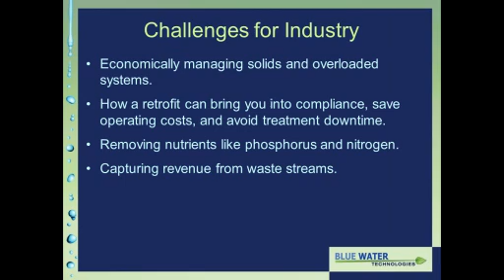But primarily I'm going to focus on getting the most out of your existing system, either through a retrofit or something of that nature, and capturing some of the lost revenue from what are currently regarded as waste streams.

Many plants in the industry have minimal treatment integrated into their existing process, and therefore they discharge to local sewage works. The primary expense in this situation is often in surcharges. Regardless of whether the facility discharges to a city or has its own biological plant, this slide illustrates where much of the water management expense is incurred.

Typically, if you're discharging to a public works system, you're paying surcharges to that system. A DAF will obviously reduce that to some extent, but typically those surcharges are going to be mass based on BOD, TSS. Quite often nutrients will be on that, as well as total volume of water discharged.

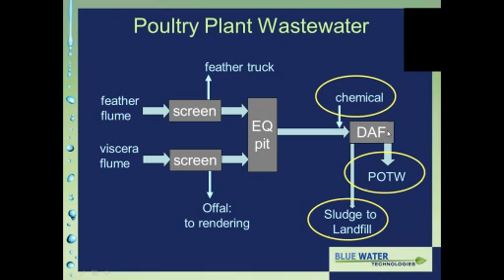Blue Water's primary goal is to save you money by working with you to improve your existing facility treatment capabilities. Blue Water is a very capable industry partner, specializing not only in unit process design, but also bringing a broad experience in cost-effective solution development. So we provide not only equipment, subunits to a treatment train, but quite often we will package together treatment solutions.

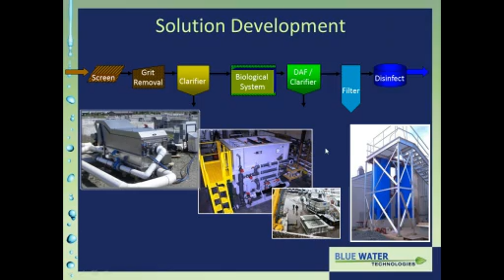Over the following slides, I'm going to highlight the benefits of various treatment stages that I mentioned on the last slide. I'll begin with the EcoMat rotating belt filter, highlighting what Blue Water sees as a critical treatment stage to any water discharge system in the poultry industry.

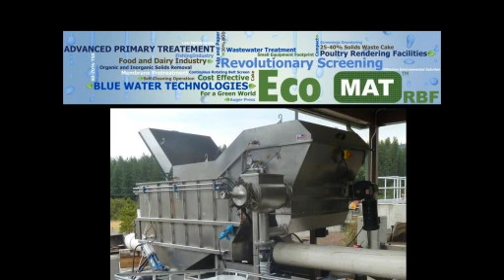Here you see pictured one of our larger units. This unit will treat roughly 1 million gallons per day, so it's got a very small footprint. Over the next few slides, I'm going to highlight some of the benefits of that. This is key to a well-functioning poultry application or poultry water treatment system.

I'll take a moment to summarize why the EcoMat is a critical subunit to an efficient process water system. A lot of the expenses I noted can be reduced with this unit. The EcoMat has a very unique filtering capability, so its efficiency is much greater than that of a drum filter, for example. It removes high amounts of TSS and BOD, upwards of 50 to 80% TSS, up to 50% BOD as well, and that's achieved as a completely mechanical process, so there's no chemical costs. It's very low power cost for this system, as I'll highlight later on. So there are some very stark cost reduction capabilities with this unit process.

In addition, what we've recognized over the last few years of integrating this equipment in the poultry industry is you can capture or recapture a revenue stream. The solids collected, if done without chemical, can have value in rendering. This captures between 50 to 60% of the solids out of the waste stream, which is significant when you're talking about a waste stream that might have a couple thousand milligrams per liter of TSS. So there's a rendering value to that. If you capture early enough in the process, your grease value is much higher. Yellow grease, for example, sells or is priced currently between 40 to 50 cents per pound. So there's some value in that stream.

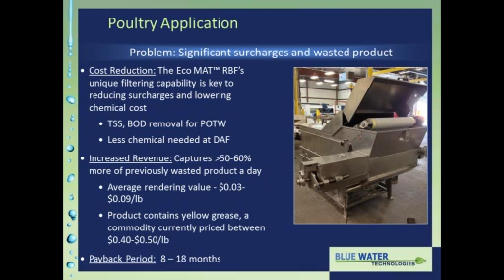In capturing that value, you also get a reduction in your sludge management disposal costs. There are other facets to this treatment process we like to point out, and that's typically how we'll have a very positive payback when we retrofit or do a new installation with this piece of gear integrated into the treatment train. Typically the payback is anywhere from less than 1 year to less than 2 years, so a very positive payback on this piece of gear.

Some of the key benefits are highlighted in this broad process flow diagram. The EcoMat is a low-energy input subunit that saves money by reducing chemical use, increasing effluent quality, and producing that value-added solid slurry, as we mentioned. Typically, a lot of plants attached to poultry processing, poultry kill plants that discharge to public works systems, have DAF systems or some sort of screening already in place, whether it's overloaded or not.

The nice thing about retrofitting the EcoMat is its very small footprint makes it easy to retrofit, but it takes over 50% of the solids loading off of an existing treatment system with just that small unit process. That's a huge reduction in chemical usage, a huge reduction in power usage, and it leads to a higher effluent quality coming out of the back end of that process going to a public works system. And again, there's that rendering stream.

Now, if the plant has its own biological treatment process, this will help with any overloading issues because you're taking up to 50% of that solids and BOD loading off at the front end. So that biological treatment system can maintain a compliance level much more easily and cost-effectively.

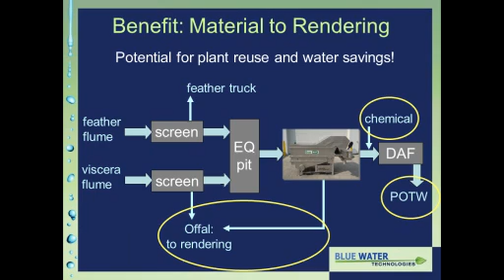So I mentioned drum screens earlier. The EcoMat's been integrated downstream of primary drum screens as a secondary barrier. It's also been integrated as the primary and only screen on a treatment process as well. So here's a rough comparison of the EcoMat rotating belt filter operating in parallel with drum screens for operational comparison.

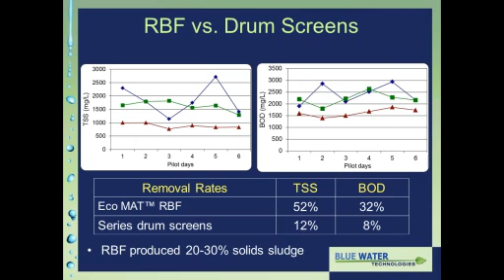And it's very reliable, engineered to be very sustainable in a variety of applications, not only the poultry industry, but we provide this process to a variety of industries, including municipal sewage industries as well.

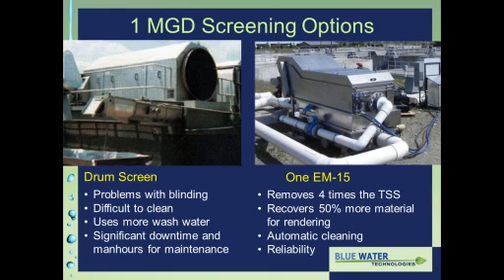As I mentioned, the bottom line is money and cost reductions, cost savings. You can save money in terms of space, capital, redundancy, flexibility. Money takes many forms in these capital projects, and this just kind of illustrates a comparison.

Now again, this is a conventional clarifier. A DAF system is slightly smaller, but you can see there's significant footprint differential. The EcoMat is very easy to install because of its footprint. You don't have extensive earthworks or concrete design costs, engineering costs, engineering the pad even. All of that can be very expensive. So if one of these systems is being installed, there's a lot of upfront capital advantages to this treatment system.

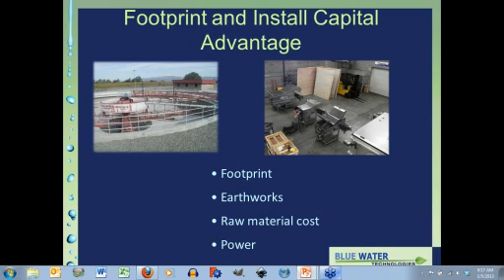So illustrating the benefits that I've highlighted is this case study for a Blue Water provided rotating belt filter in South Carolina. This was installed as a secondary screen. They did have a drum screen as their primary. They had no further treatment, didn't even have a DAF system actually at this particular location. So they just had screening, then discharge to the public works system.

This particular plant was a kill-only plant. They averaged between 0.6 and 1 MGD peak flow for their processed water flow through this plant. The install reduced the surcharges to the public works system, and through recovery of renderable materials, they had inside of a year payback. There's a couple of figures here: this has been operating since February 2011, and they average roughly 6 to 8 pounds of dry solids per 1,000 gallons of processed water treated for rendering.

So that again just illustrates a positive economic scenario where this rotating belt filter can have a very positive impact to the overall economics of the poultry processor.

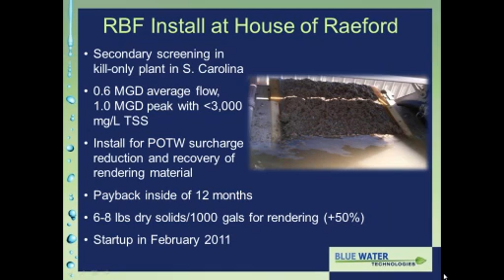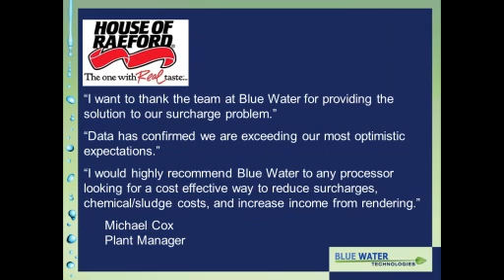This is a reference from that plant in South Carolina, and we're very happy with the installation. With all of our installs, not only this particular technology but all of our product lines and process solutions, we have several recommendations and references that can be supplied by request.

I want to transition and give you further definition on our rotating belt filter and examine how it works. How does it function? What level of treatment will it provide? We've touched on that briefly, but I want to give you more detail, and describe how it ties into your plant and what it will do for primary and or secondary screening.

The theory of operation, the methodology of solid separation, is that the screen builds up more and more solids and forms a thick mat, which filters out smaller and smaller particles. That's how you get those high efficiencies of capture. The belt travels upward and is cleaned on the backside, so as it comes around the bottom end it's a clean mesh. You get screening to the pore size of the mesh, typically a 350 to 500 micron mesh. As you collect more particles you start building a semi-porous mat, so you get filtration as that mat thickens. Your effective mean filtration size decreases as the mat grows thicker, and therefore your capture increases as well.

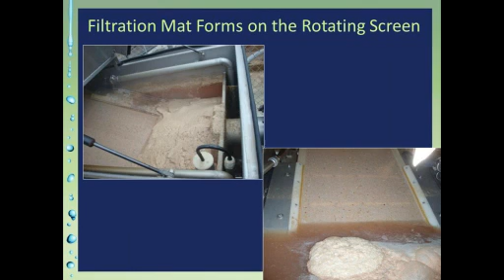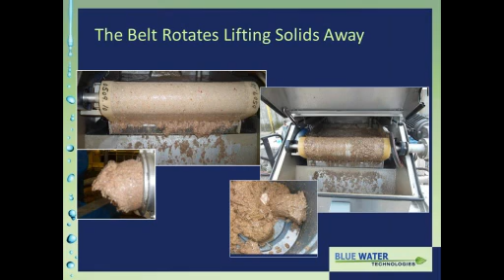In this next picture you can see the top end of the roller where the solids come over the top and are discharged into a sludge conveyance or dewatering hopper. There's a screw in this hopper, and whether it can be dewatered depends largely on solids particle size and the amount of fibrous material remaining in the waste stream. Here are a couple of pictures of applications where dewatering was achieved. Again, that's cost reduction in solids management and handling, and it also provides a drier stream to a renderer for rendering out the fats and proteins.

Just another shot of that sludge conveyance. Looking down into the hopper in this upper left-hand picture, you can see a conveyance screw, and depending on the solids makeup, you can have a solids discharge, or it might look more like a slurry that's roughly 7 to 10% solids. Sometimes those slurries, even though they're soupy, are slightly higher in solids because the moisture content is pretty low—there's actually a lot of grease in there and a lot of smaller particulate.

I want to point out that Blue Water can demonstrate this process in a variety of ways. We do a lot of pilot systems and pilot programs around the country where we'll demonstrate the capability of the process before going into design. There's also bench test simulations that predict performance prior to even coming on site for a pilot. We just gave one away at the Poultry Expo in Atlanta. A pilot is a good way to prove out this technology before design, to estimate how much solids can be removed and estimate the rendering savings, O&M savings, chemical reduction, etc.

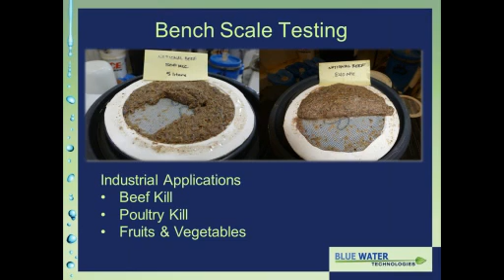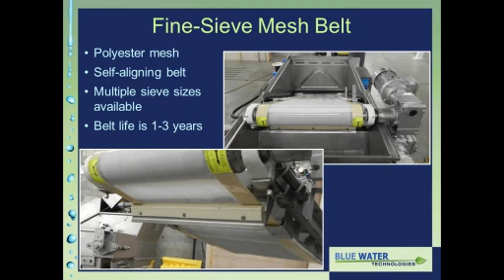There are multiple sieve sizes available, but as I pointed out before, typical sieve size for a poultry processor is going to be between 3 and 500 micron. These belts are designed to be very long-lasting. Typically the belt life is 1 to 3 years, and they're very simple to change out.

To handle waste streams with high amounts of oil and grease, which you typically have in poultry processing, there is an integrated hot water wash. We've used this EcoMat rotating belt filter in a variety of different applications, including beef and sausage processing, a lot of applications where there's a high amount of grease. This periodic degreasing works very well. Typically we program this to come on maybe once every 30 minutes or once every hour, a 30 to 60 second wash, low volume, typically 2 gallons a minute for most of our single units. So a very low volume degreasing wash that can maintain that high level of performance and separation for this unit process.

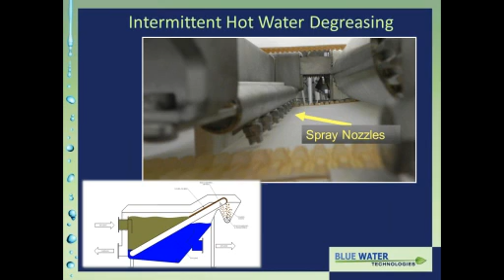The cartridge mount configuration is really what makes this technology so expandable in treatment capacity. Blue Water has 4 base cartridge sizes integrated in a flexible and capable product line. The modular nature of the machine means it can be integrated on any flow range. We've integrated these on some sausage producers with flows averaging 30 gallons a minute. I'd say the majority of our poultry kill plants are in excess of 1 million gallons per day, up to 2 million gallons per day. That's a fairly typical range for how these are installed, but again, we can handle any treatment capacity because of the modular nature of this technology and equipment.

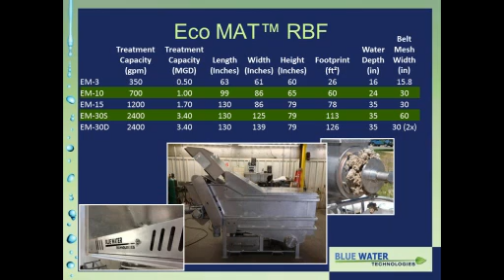Here's just a couple of production photos to share with you. These are units on our shop floor going out to customers. You see pictured here a half MGD unit, and in the back there is actually a 1 MGD unit. That's our EM3 and our EM10 units. This is also an EM10 in the lower right-hand picture. These units are made in the USA. Our manufacturing is located in the northwestern U.S., so we can provide the support necessary to keep your system online continuously.

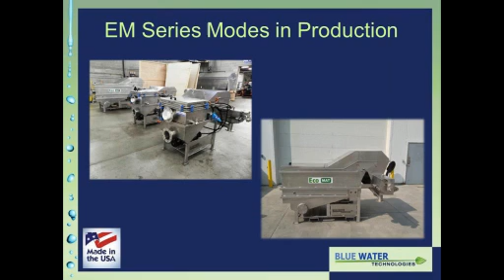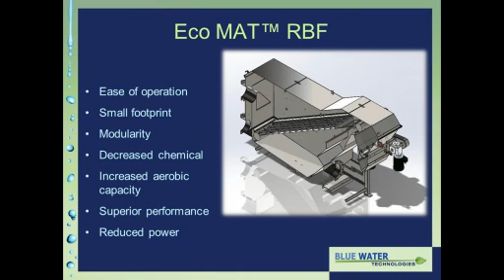Just to summarize this unit process before I move on to our other treatment technologies, we really believe this is key to an effective process. One, you run without chemical. It's very easy to operate, small footprint, fully automated, modular, and you increase the capacity and capability of your downstream treatment process, whether it be a DAF, a biological system, or a filtration system. It adds superior performance to your entire treatment process, with low power input, very much reduced power not only within the system but within your downstream train, because you're removing so much of the load.

Now I do want to transition to other treatment options that can be provided based on need. The EcoMat and other clarification systems remove high amounts of TSS and BOD, but there are some applications where further BOD reduction is required. Maybe getting to a discharge level of 200 or 150 milligrams per liter BOD isn't enough, maybe you got to get to 50 or 20. In that case, you're looking at a biological treatment process because all of the remaining BOD is going to be completely dissolved. Another situation that might require biological treatment is if you have any need for nutrient removal.

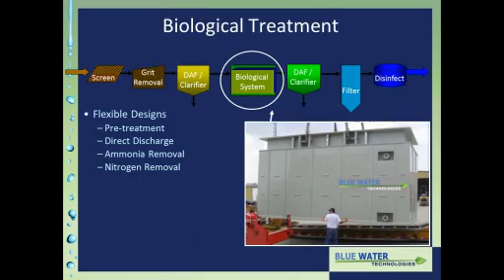Blue Water has a technology, or several technologies actually, for biological treatment that could be readily implemented. This is an MBBR system. They're great because they have a compact footprint, typically a slightly higher energy input than activated sludge, but again you get that reduced footprint savings, very capable treatment. It is a fixed film process, so it's fairly shock resistant as well.

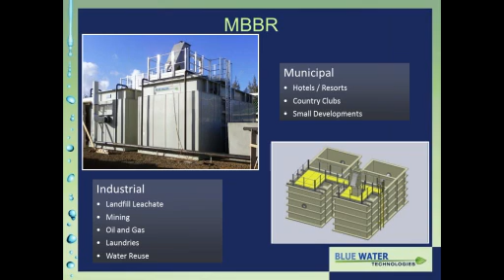We have our EcoDAF system. It's great for TSS and BOD reduction. Single unit capacity is very modular, anywhere from 5 to 1,500 gallons a minute, and we have a very consistent track record in the poultry industry for treatment using this technology.

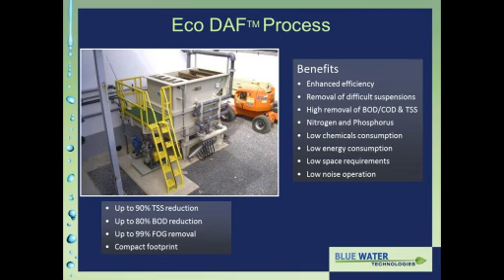In regard to the bench testing or pilot testing conversation I had earlier with the EcoMat, we do the same thing with our DAF systems, and sometimes we'll do it as we're doing an EcoMat pilot to help optimize the existing chemical regime. So we prove out that we can get a chemical cost reduction and then show that treatment either with jar testing or with a pilot system on site.

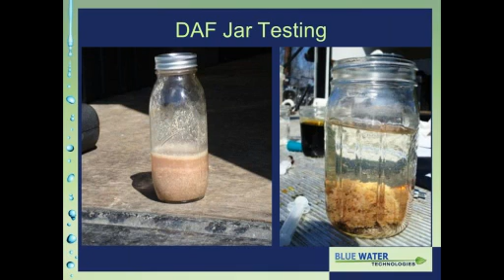Now, nutrients traditionally haven't been a huge thing in the poultry industry, but I'm bringing them up because they're becoming more and more important. If you're discharging to a public works system, you're going to see them more and more on the discharge surcharges, and typically they'll be fairly expensive, especially regarding phosphorus and nitrogen, because the poultry discharge water has a high level of nutrients, and that's a high load to their plant that they're going to charge you for. So we do have some really good technologies for reduction of nutrients. Actually, that's one of our primary businesses in other markets, the municipal market itself.

Our brand is the Centra-flo filter. It's a media filter that provides water reuse quality filtration. So if there's any opportunity for water reuse in the plant, this is a key technology to consider. Like I said, it supplies water reuse quality filtration. You can get a reduction in the amount of water you're bringing into your plant for usage, and a reduction in the water you're discharging from your plant. So there's a couple of opportunities for cost savings just in polishing the water of solids.

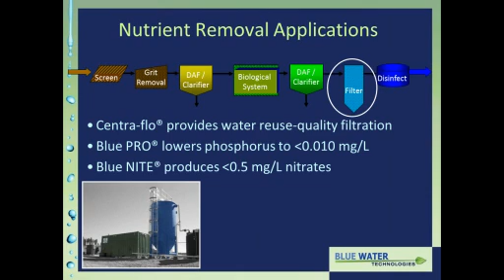In addition, we can implement processes, the Blue Pro process and the Blue NITE process, to remove nutrients. We can remove phosphorus all the way down to below most any compliance level I've seen throughout the U.S. We have installs operating at less than 0.010 milligrams per liter, which is lower than most people will see. Most people in this next round of permitting for a lot of plants are seeing maybe 0.1 or 0.07. We also provide the Blue NITE system, which can polish nitrates down to below detection limits. We've installed those in applications where the influent might be nitrogen-rich, up to 200 milligrams per liter of nitrates, going out at less than 10, less than 5, or less than 1, whatever the requirement may be.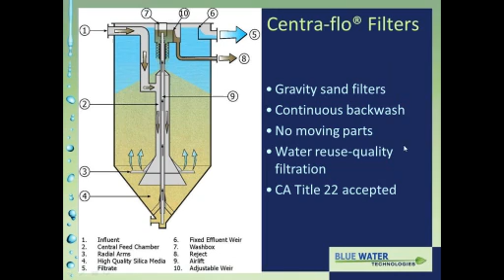And again, the water reuse quality filtration. They are California Title 22 approved for reuse, and they're also approved in multiple other states as well. But since California is one of the more stringent, that's typically the one we'll advertise the most.

Now I'm going to focus on nutrient removal over the next few slides. For phosphorus removal, the real key to our life cycle benefit and chemical cost minimization is the adsorptive properties of our process. What's been very traditional or conventional in water treatment is the use of coagulation and then filtration to remove phosphorus. Well, Blue Water doesn't do that. Coagulation and filtration, just to give you an illustration, is you dump a coagulant, a chemical, into solution, a bathtub, a clarifier, and you try to form a large enough particle size that it will not fit through the media, so it'll get trapped in the interstitial spaces of the media. What that leads to is a plugged filter. You're always operating a semi-plugged filter, and it's not very efficient chemically.

What we do is we actually coat the media with a metal salt. We add a ferric salt typically to coat our media. It gives a very homogeneous ferric hydroxide coating to the entire sand granule. That's what we use, the silica sand, so it's a commodity media, and it's a commodity chemical added to create that coating. What that coating does is it will adsorb phosphorus. So rather than relying on diffusion in a big bath, which is what coagulation does, we guarantee contact between any dissolved phosphorus in the stream and the adsorbent, the substrate, which is the ferric hydroxide. So you're guaranteeing contact. A media bed that has 60 inches of depth has an astronomical surface area, so very high efficiency uptake of dissolved phosphorus in this system. That's really the key to minimizing the chemical and operations costs and achieving compliance levels.

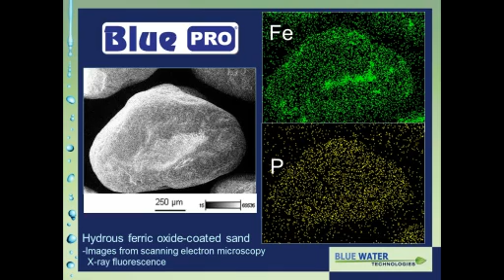Here's a couple of case histories I'm going to share with you regarding phosphorus that we've done around the country. This is more to illustrate the size of systems that we've done, because there's challenges that are unique to very small systems and very large systems. So this first one will illustrate some of the challenges that were overcome with a very small system.

2 CF-7 sand filters, 25,000 gallons per day peak flow on this particular system. But they had a very stringent phosphorus requirement, so they have intermittent flow. There's a recycle tank on this process. But you can see here the design was very capable. This was just a month of operating data from last year, actually.

So you can see the compliance level highlighted in red. There's two stages to this treatment system just to guarantee compliance. With stresses to the system, sometimes that first stage will go over the compliance level, but largely it actually meets it. In the second stage, you're guaranteed that compliance level for this particular system.

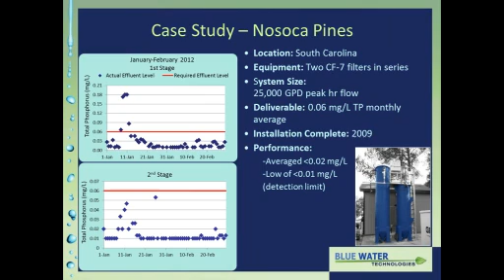So that's a good example, a strong example of a case where the system was very small but very well designed and very capable. This next story I'm going to share is on the other end of the scale. It's a very large system, peaking at 12 million gallons per day treatment flow. Again, this is another technology that's very modular, very expandable for treatment, and very flexible for levels of treatment compliance.

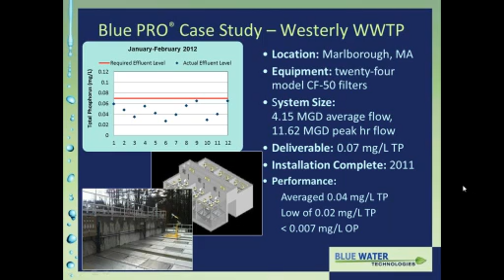Many of our industrial discharges might only need to meet a milligram per liter phosphorus. That's pretty typical. Some are being pushed to 0.1. It's fairly rare, mostly in Midwestern states like Wisconsin and Minnesota, that are having to meet anything more stringent than 0.1 as an industrial discharger. But here's a case where they are definitely meeting 0.1. They're actually permitted to 0.07 and maintaining that level very well. This one is in Marlborough, Massachusetts, and it's been operating now for a little over 2 years.

Now, in addition to phosphorus removal, we can do denitrification, and we can do it within the same treatment stage, within the same treatment vessel as the phosphorus removal, which is one of the strengths of our technology. So you get polishing, filtration, phosphorus removal, and biological denitrification all in the same treatment stage.

This case study is from Texas. The total phosphorus coming in, after the biological treatment plant up front, was down to 3.4 average coming in, and left at 0.14. Their permit was 0.2. And then for nitrate compliance, they were coming down from nitrates greater than 10 to less than 2.2. Their compliance level there was 2.5.

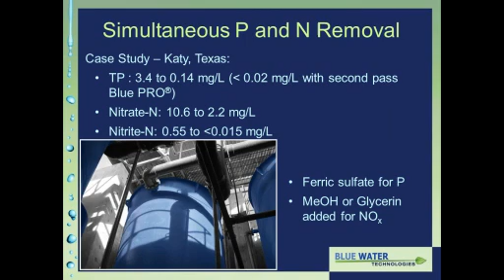So it's a very economical system, because you get multiple benefits from one treatment stage, with very low chemical inputs. You have ferric sulfate in this particular case for the phosphorus removal, and that's just to coat the media for this system. And then we're adding either methanol or a glycerin product, some other carbon source potentially, for removal of nitrates, to convert nitrates to nitrogen gas biologically. So again, a very successful case study for implementation of those nutrient considerations.

I'm going to leave that now and wrap up with some of our manufacturing capabilities. So you've seen sampling of our processing equipment. Our manufacturing capabilities allow us to provide not just unit processes but solutions. We're not just providing a cookie cutter insert that you can fit into your treatment scheme, but we can work with you and provide a well-integrated treatment system that'll fit into your puzzle very nicely.

Again, I'll highlight that we have a UL listed panel shop, so we can do completely customized controls. We do have mobile systems as well, which probably isn't extremely interesting within the poultry industry, other than to demonstrate and prove out the technology. But again, I will highlight that we're a U.S.-made company.

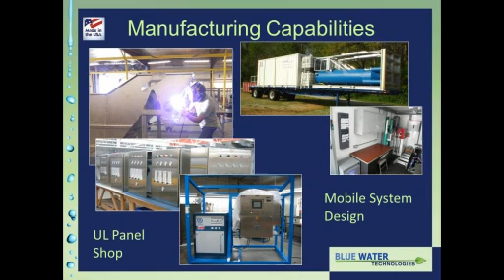This is a pilot system that's mobilized. It's actually in excess of 1 million gallon per day capacity, so this will do quite a large flow, but we can mobilize this system as a pilot system as well. As I mentioned, the benefits are for treatability projects, contract treatments, while doing a design build to save money in the interim. You can do an economic analysis, a short-term pilot study, and also demonstrate it for engineering or plant manager confidence, basically.

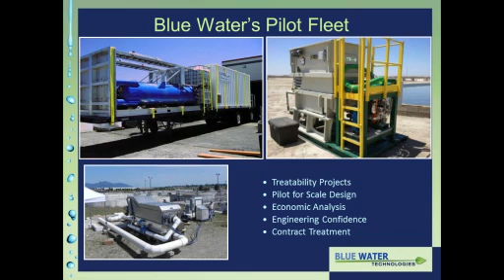So with that, I'd like to conclude our presentation today. I hope that I have sufficiently shared our methods for managing overloaded systems or discharge challenges. We can help reduce the financial impact of water treatment to your plant. We've highlighted increases in rendering revenue, recapturing a waste stream, turning it into revenue that can help pay for the water treatment and disposal throughout the poultry processor, the kill plant.

In addition to that, with integration of our EcoMat rotating belt filter or other unit processes, we can decrease overall chemical usage, power costs, and hauling costs. So those are all cost reductions. In addition, surcharge reductions, if you're discharging to a public works plant, a municipal plant, a sewage plant. And in addition to that, if you can get any reuse, there's a decrease in water usage and cost as well. So I hope that gives you a broad overview of what Blue Water focuses on in new projects.

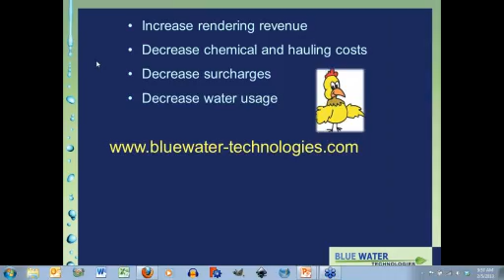What are typical replacement parts and costs for the EcoMat rotating belt filter? I mentioned low life cycle costs for a lot of our equipment, including the sand filters. It's a non-mechanical system, so that has very low operations and maintenance life cycle costs. DAF systems, same thing - you have a couple of pumps that may or may not need to be replaced throughout the life cycle. EcoMat is actually very similar. You do have bearings, a head roll and a tail roll. I'm going to go to a cross section of that system so we can look at the mechanical components more closely.

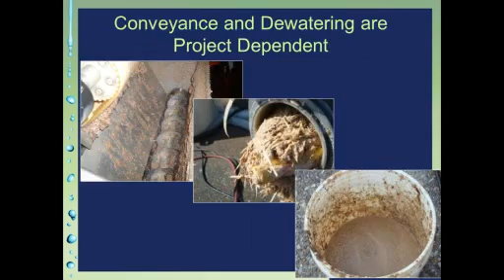Another question is how easy is it to simulate phosphorus testing on the bench scale? I talked about EcoDAF systems on the bench scale and the EcoMat - we can also do full simulation of our nutrient removal and filtration processes on the bench scale, including our adsorptive phosphorus removal. We actually do a lot of bench testing for other industries, not just phosphorus, but for metals compliance as well, like zinc, copper and lead. We do a lot of power plants with that same polishing technology, and we can simulate all of those on the bench scale as well. The bench scale test is a great way to do a litmus pass-fail on the project, and justify going into either a pilot or design. Most applications in the poultry industry are pretty straightforward - you know you're going to get X removal. It's just about gaining finalized parameters for sludge management and operations costs, chemical savings downstream, and whether you might have an existing system like a DAF or biological treatment system downstream.